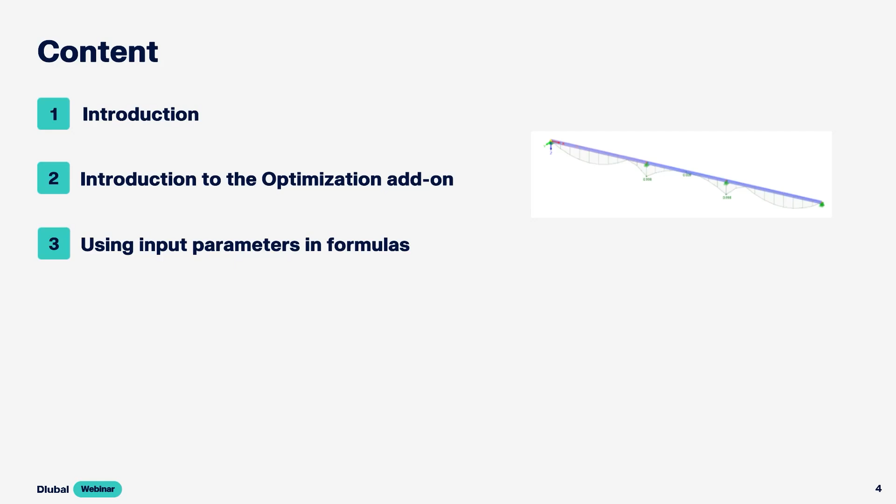Thank you, Andreas, and welcome to today's webinar. Today we want to deal with the optimization add-on, and first of all I want to show you how to activate the add-on and give you a small introduction, and after that I'm going to show you how you can use this add-on to optimize global parameters and how to use parameters in formulas and optimize them.

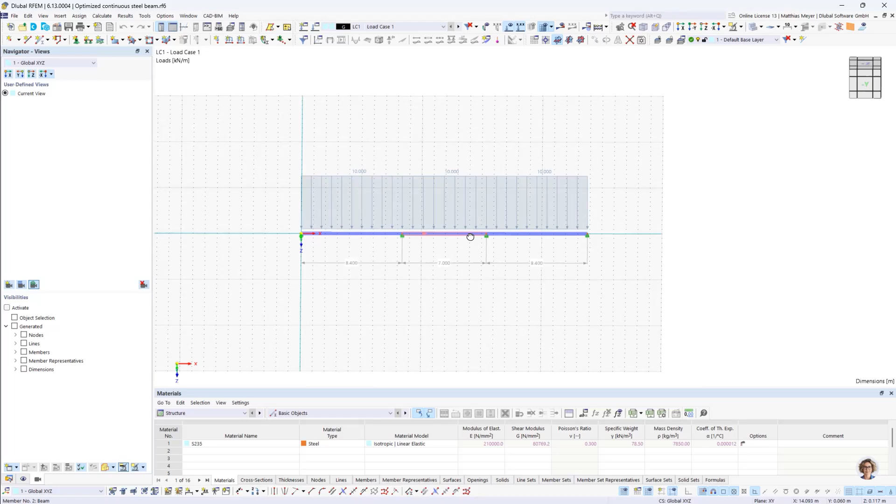So we are going in. First thing I want to do is optimize a continuous steel beam. It's going to look like this. We have two outer fields which have the same length and an inner field, and the length of the outer fields differs from the center field. So we have a symmetric system.

And what we also have is a continuous constant load of 10 kilonewtons per meter. We also want the self-weight activated, and we ask ourselves, okay, how long can this beam be at its maximum, which length it can span. The material is given, and also the cross-section is given. It's an IPE 240 and we have S235 steel. All right.

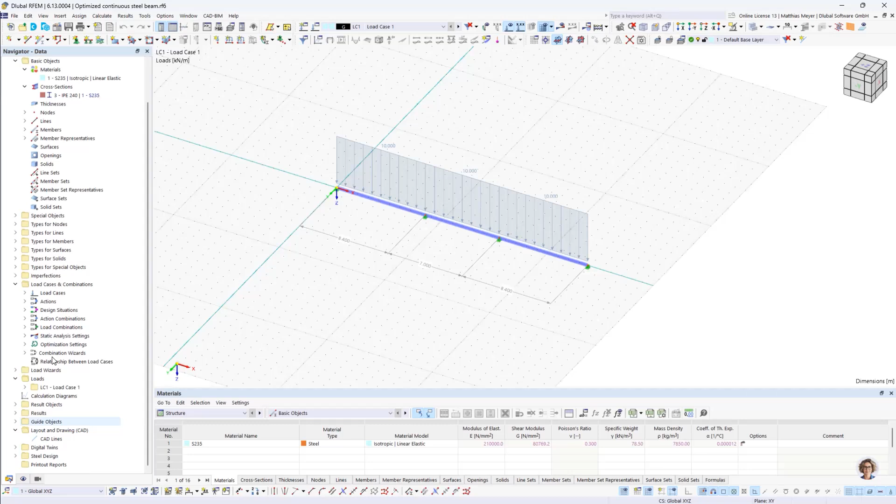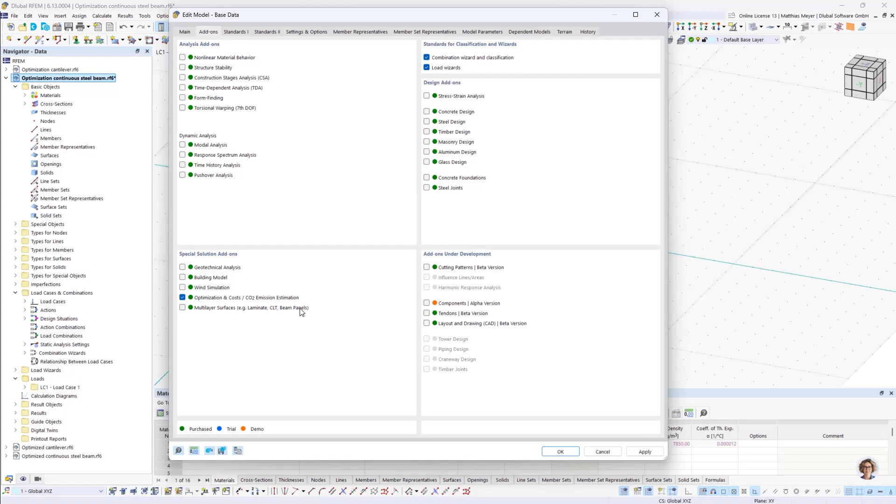So first of all, we have to activate our add-on. We're going to do this at the base data interface. Until recently, the add-on was here on the right side. Now it's on the left side. We activate this checkbox. We also want to activate steel design. And we're going to choose the recommendations of the CEN. And click OK. And the first thing we have to do is define our nodes.

The first node will be at 0, 0, 0. The second node is at 5, 0, 0. We don't know what the maximal span length is. This is just a guess, and for a start I'm guessing it's 5 meters. And so the next one is at 10 and the last one at 15. All right, then we have to put our beams between the nodes like this.

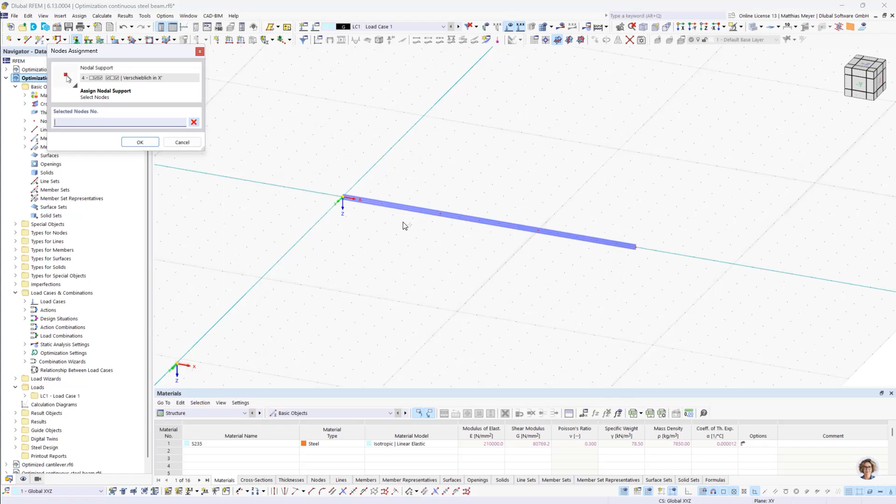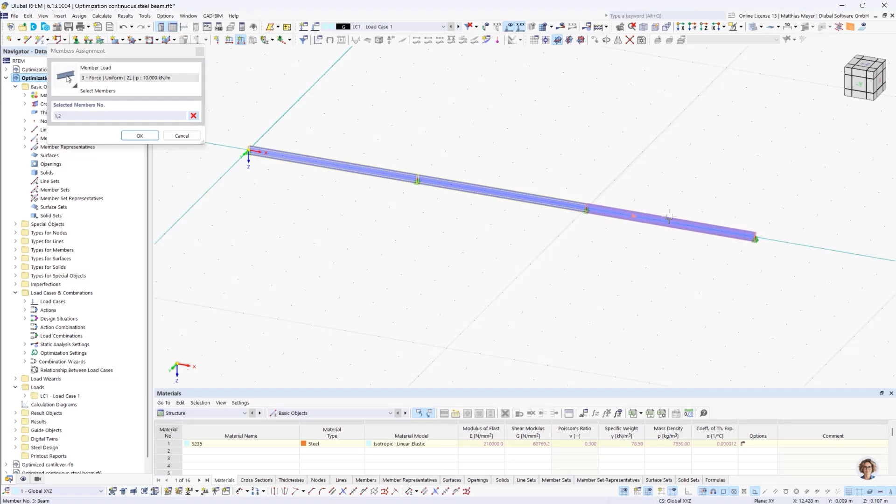Then we have to add some supports. The first node will be fixed in X direction. Okay. And the other nodes are not fixed in X direction. Okay. Small check if everything is all right. It is. And then we apply some beam load. Oh, this was the wrong interface. We need this one of 10 kilonewtons per meter. And like I said, the self-weight is activated.

And now we don't want fixed lengths, we want them dynamic. So what we are going to do is we open the nodes table, and now we define some global parameters. I am going to delete them. Yes. All right. So we go on global parameters like this.

And then we call the length of the outer fields L outer. We can also make comments to describe our parameters. Call this length of the outer fields, and then we have a length of the inner field, and give it like the same comment.

And that's it for now. And now we have to make the coordinates of the nodes dynamic. So the first one is still fixed, but the second node should be dependent on the length of the outer fields. So we give it this parameter.

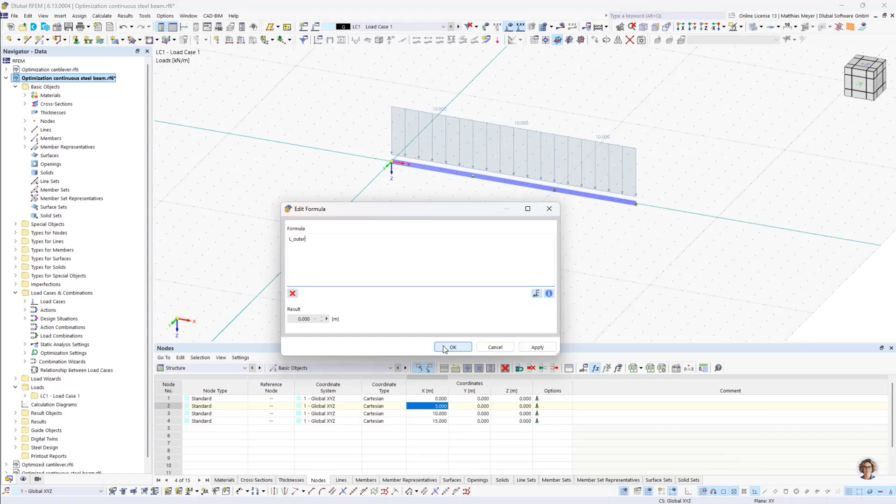We can also switch between parameter view and absolute view. And here the x coordinate of the third node has to be 1 times the outer length plus the inner length, not load, length for both. Okay.

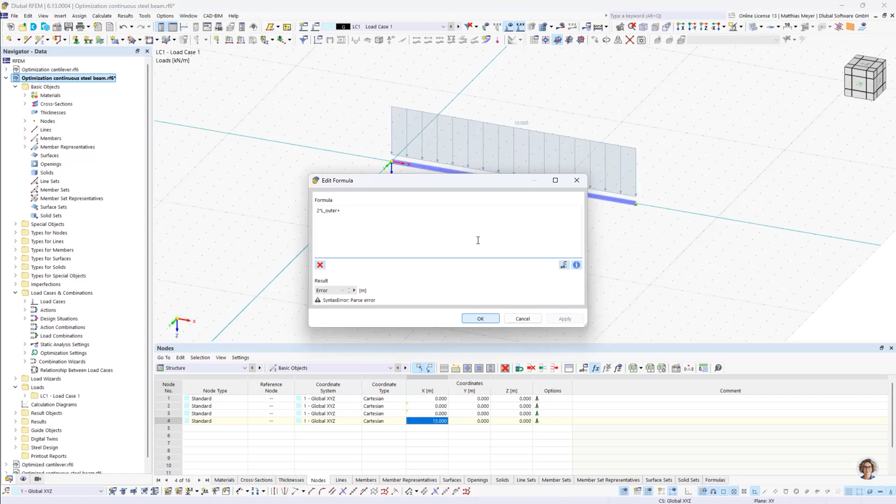And the fourth node has to be 2 times the outer length plus 1 time inner length. Here, double click. All right. So now it's all on 0. Why? Because we have to define some values in here. Like I said, we can start with 5, but we actually want to optimize this parameter.

So what we are going to do is we need a third formula for the whole length. So I call this L whole. And we define this as an optimization formula. So we define a formula, and the result of the formula we want to optimize.

Yes. So the whole length is 2 times the outer length plus the inner length. And right now it's 15 meters. And then we press OK. So our beam is back.

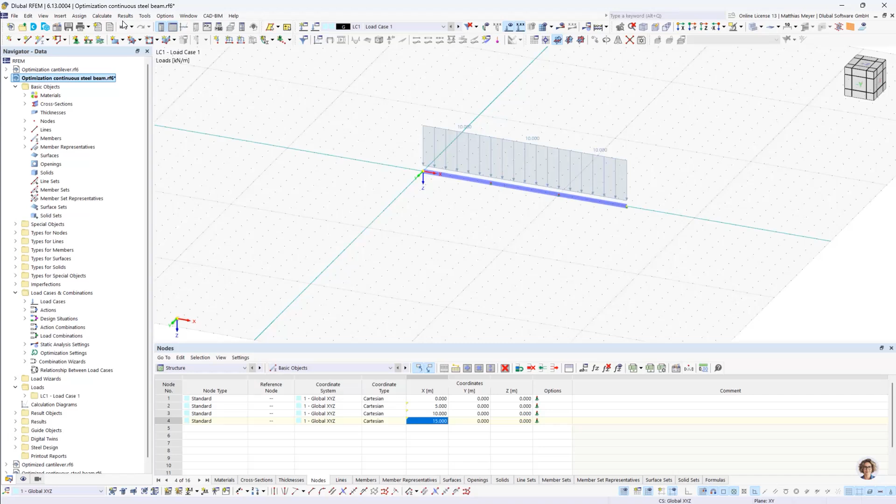And now we open our optimization interface here at Calculate, Optimization Settings. And we want to maximize our whole length. So we choose max global parameter. This is also new, also min global parameter. So these options are for minimizing or maximizing global parameters.

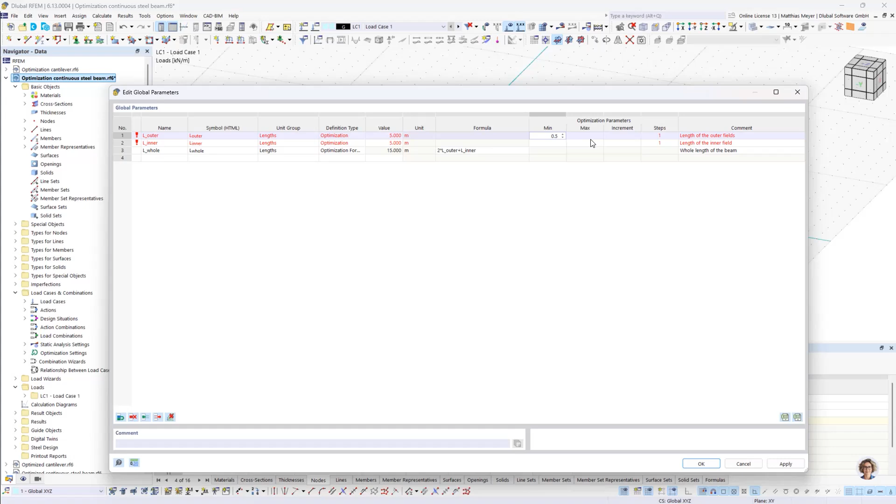Here we still have a problem because the parameters we need to change to optimize the whole length are not shown here. Why? Because we need to define them as optimization parameters. And for this, we also have to define a minimum and maximum value of this parameter. I'm going to start with 0.5 and put it up to 10.

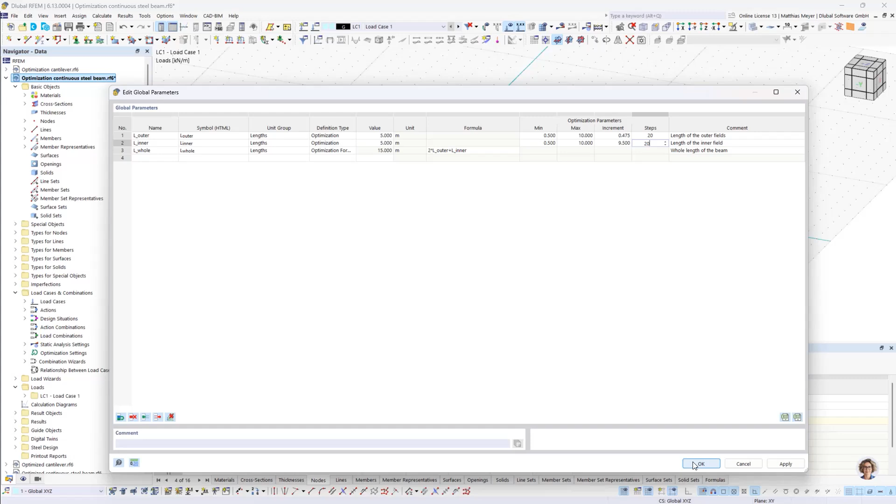So here you can also define the range of our parameter. If you say, okay, it shouldn't be longer than 10 or 11 or whatever, you can define this here. And we also need to define how many optimization steps we want to consider. I'm going to choose 20 for this example. Press OK, and now if we go back in our optimization settings, we can see our parameters here.

Right now we have 441 mutations, which is 21 times 21. So what the program is going to do is start with 0.5 for both of them, and then start increasing one of the values. And when it has done this 20 times, it will increase the second value for one step, and then use all the 20 other steps and so on.

So this is the most simple optimization procedure you can use. There are other possibilities, but for simplicity reasons, we want to stay with this optimizer right now. All right. Now we press OK. What we have to do first, which I forgot, is to press on activate. And when we have set this checkbox, we can also calculate this. Why is this checkbox here? It's so that you don't accidentally start optimization, because it will need a long time.

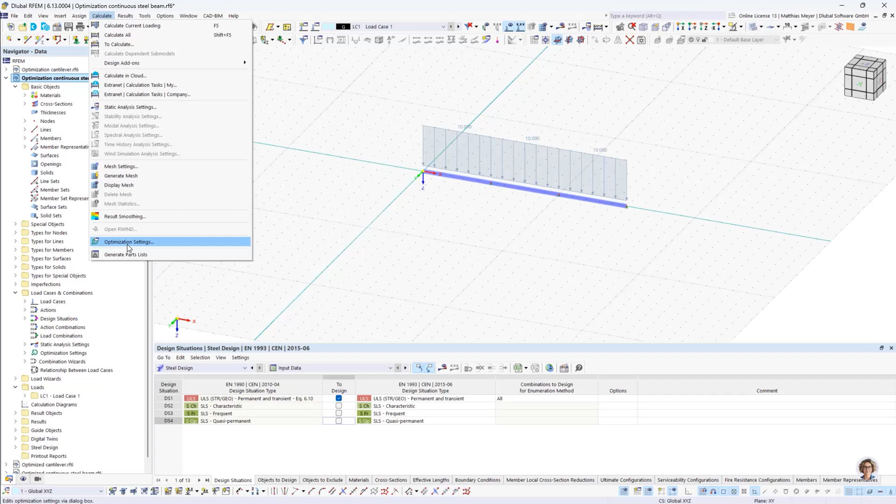So I also want to only check the ultimate limit state. So first we go to steel design and deactivate the other states like this. And now I'm going to start the optimization process. And you can see that it actually needs some time per step. So at one point I will cancel it, but I just want to show you how the calculation procedure is done. Like I said, it starts with 0.5, 0.5.

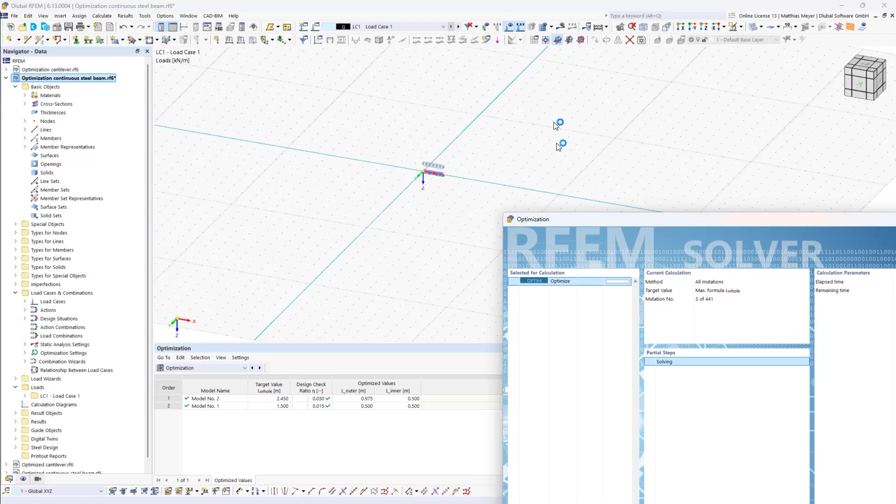It will also always adjust the model. And now it's increasing one parameter step by step. But like I said, 441 optimization procedures will take a lot of time, so I'm going to cancel this right now.

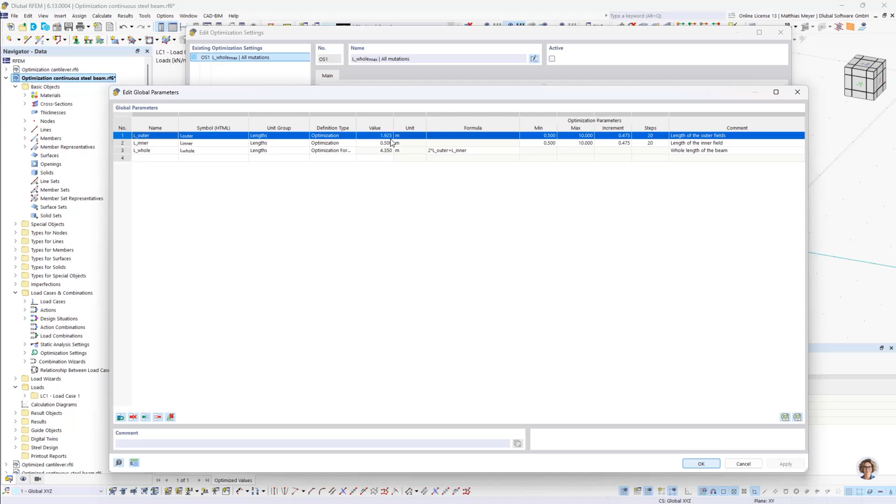Okay. If you cancel the optimization procedure, it will take the last optimum it could find and will set all our parameters to this last optimum. So it's set on 1.925 and 0.5, and uses this also for our model.

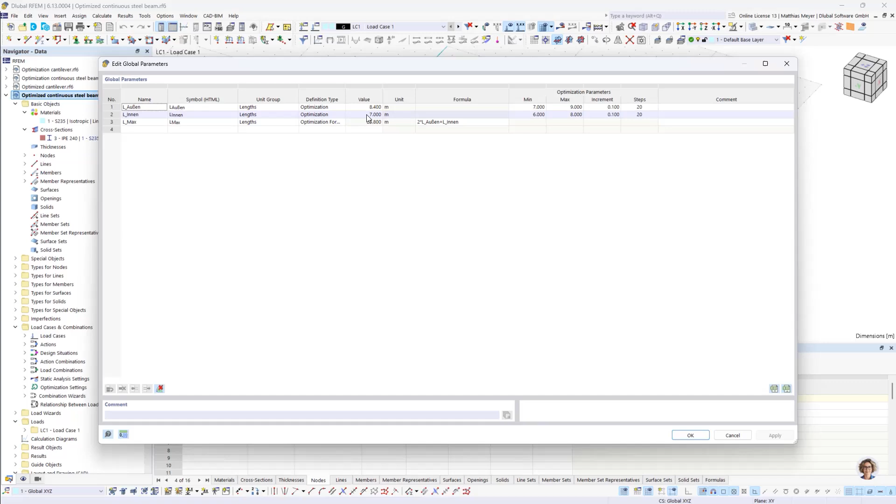Here I have the whole system optimized. You can see that our parameters are set to these optimization values, and I'm going to show you in steel design. Here you can see the utilization is almost at 1.0. We could use more steps and then we would get closer to 1.0, but for now this is fine. And for our maximum length, we can use guide objects for this using dimensions.

So in this case, the optimized length would be 23.8 meters. We can also see the biggest moment would occur here over the center supports, and also the outer fields are longer than the inner field. All right, so this was for the continuous beam.

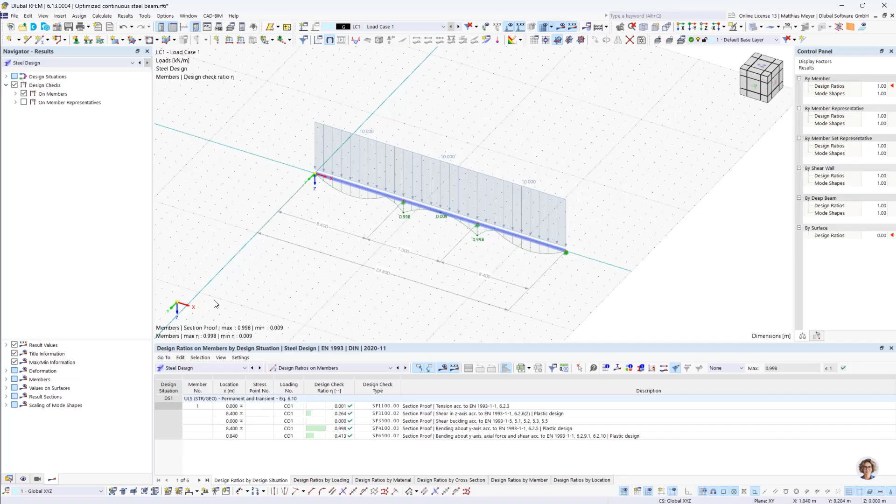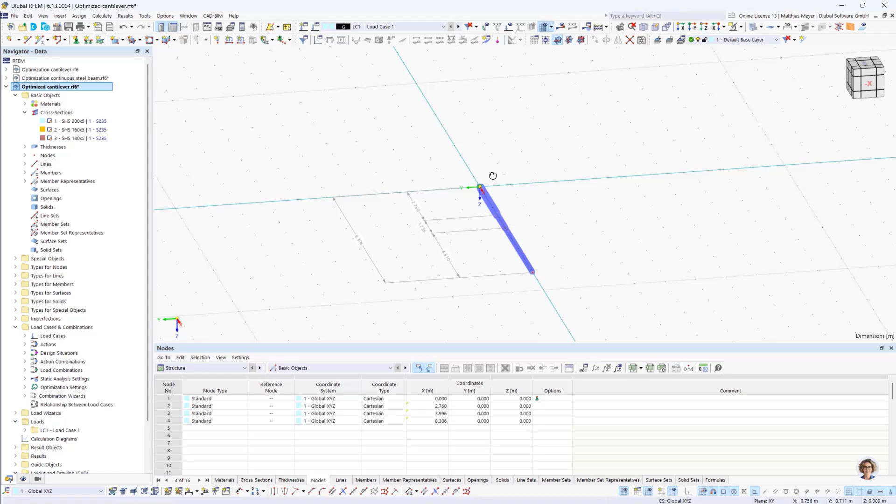And the next thing I want to show you is how we could optimize a cantilever. So we want something like this. We have a cantilever with 3 sections, and for each section we will use a different cross section. Here I choose these cross sections, and you can imagine that

because we have a linear increase of the moment, the biggest moment will occur here at the support. So we need the most resistance over here, and for this reason we could use a weaker cross section at the beginning of our beam, and so on. All right.

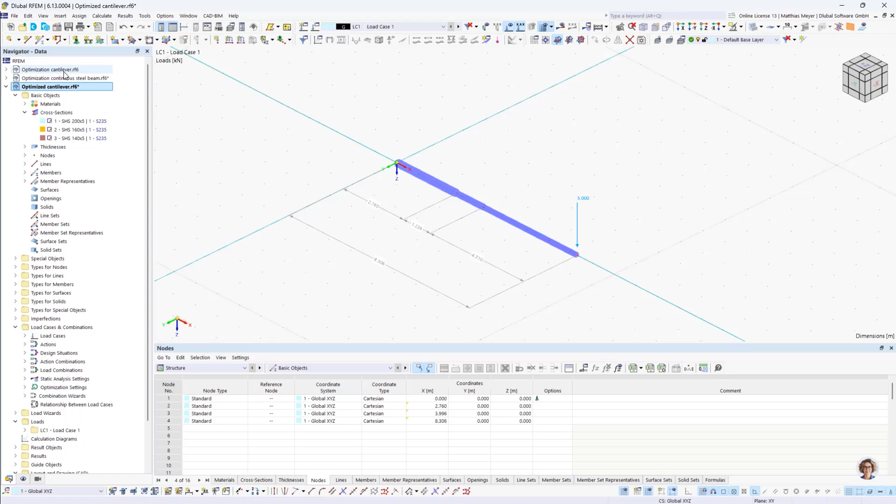So the first thing I have to do is activate our add-on again, also steel design, and I'm going to use the recommendations. All right, then I have to define my nodes, start at 0, 0, 0, and the first segment will have a length of 3 meters, next one 6 meters, 9 meters. Okay,

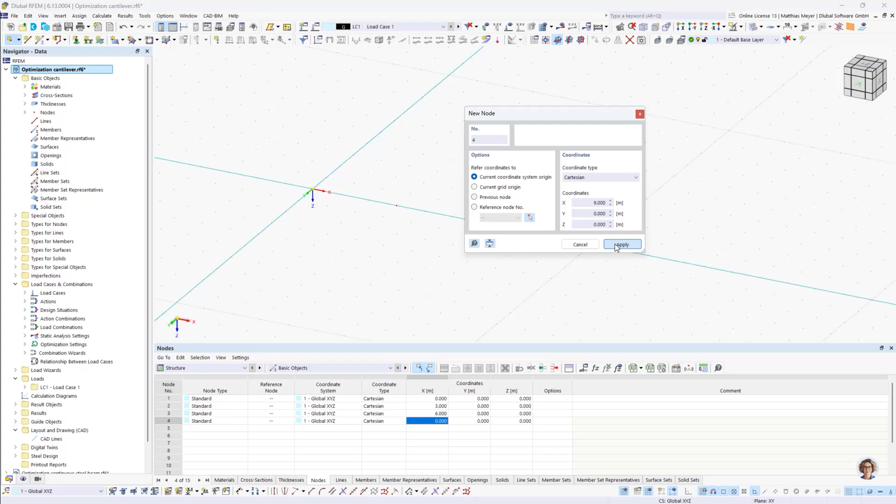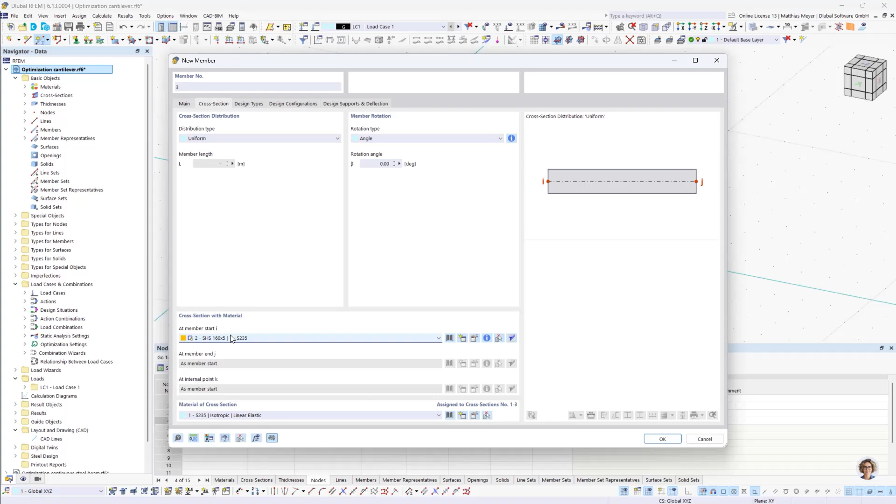then I'm going to apply our beams. Start with the strongest cross section. Then the middle strong cross section and the weakest. Like this. Add a nodal force, okay, 5 kilonewtons, and then I also need a fixed support at the beginning of the beam, okay, like this.

Also the self-load is activated, and now I'm going to define my global parameters. I name them length 1, length 2, and so on. And length 1 is the length of beam 1, and so on.

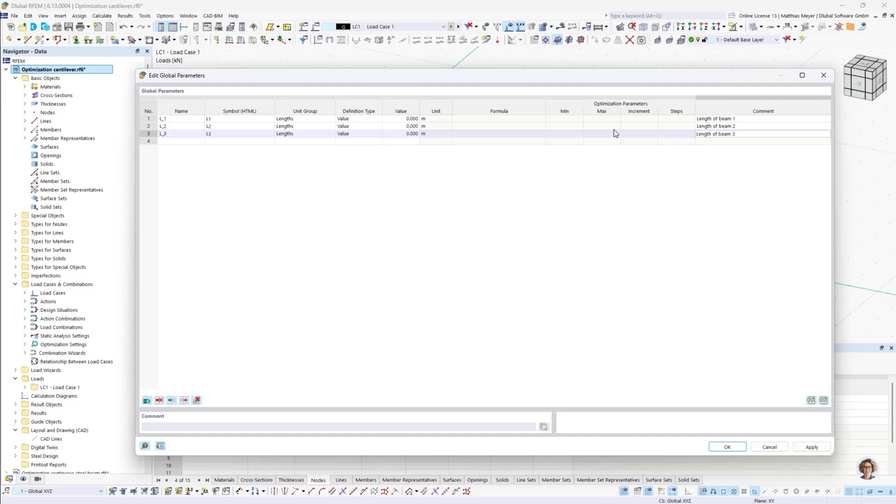Okay, I want to optimize them, so now I will change the type to optimization, and for the beginning we will stay with value, but I will change this after I applied these parameters to my nodes. So the first node is at 3 meters, which is 1 times length 1, and so on.

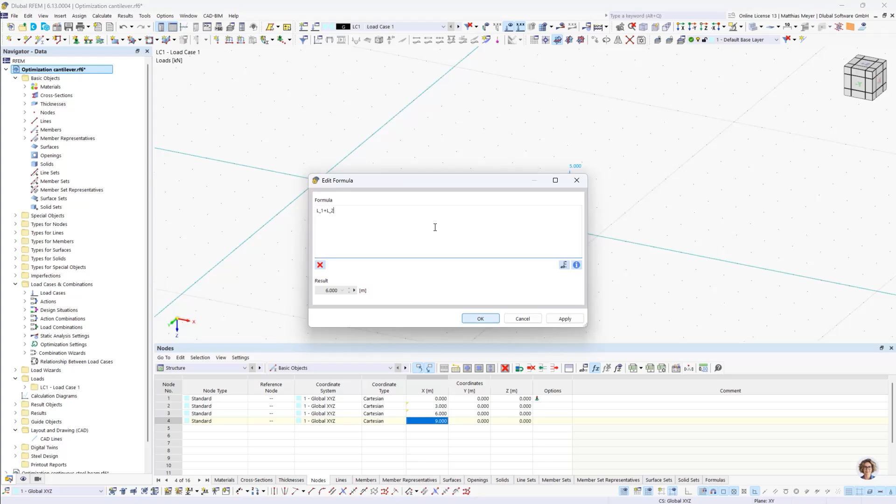All right, and the first thing we are going to do is conduct a steel design procedure one time, just to have an idea about how long our beams or our segments will be. And what we can see is, okay, the first segment could be a lot longer and the other ones are probably smaller. So what we are doing now is going back to global parameters.

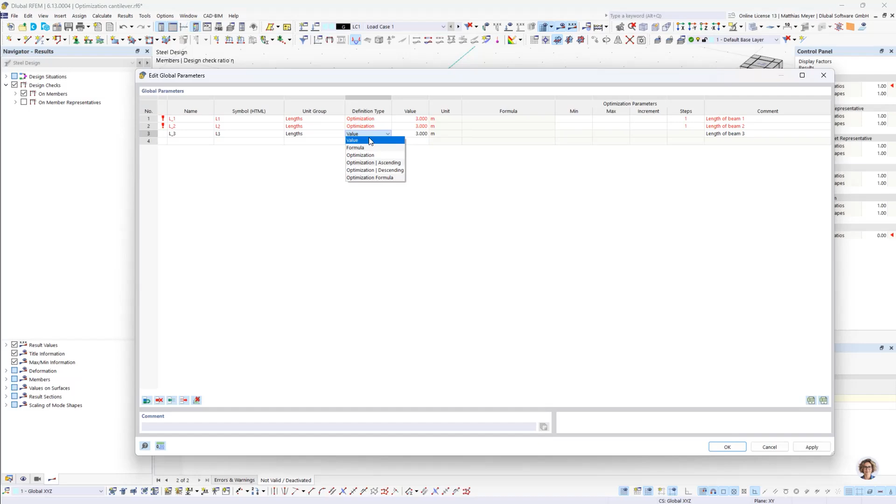We want to optimize them, so we put them on optimization, and length 3, which is the length of this segment, we are going to start with a length of 3 meters and give it a maximum of 6 meters. We'll use 5 steps. And for the middle one, I'm going to start with 0.5 to 2. I kind of know the optimized length, so that's why I'm going to choose this.

And for the last one, for length 1, we start with 2, and it's between 2 and 4. Like I said, I chose these values because I kind of know what the optimized length is. Okay, then after this,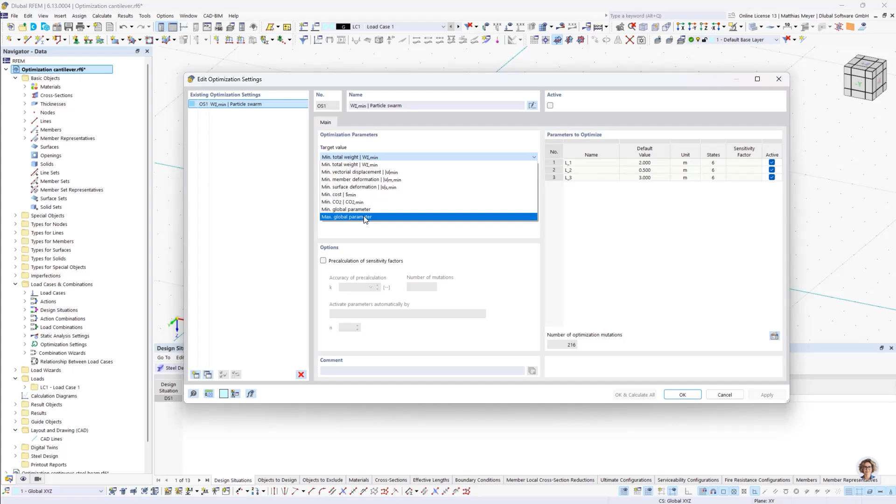we are going to open our optimization settings, and now we only want to optimize length 3, because length 3 is kind of independent of the other lengths. So we have to choose parameter length 3, deactivate the other ones, because we only want to optimize this one right now. Press on active, and then we press OK and calculate.

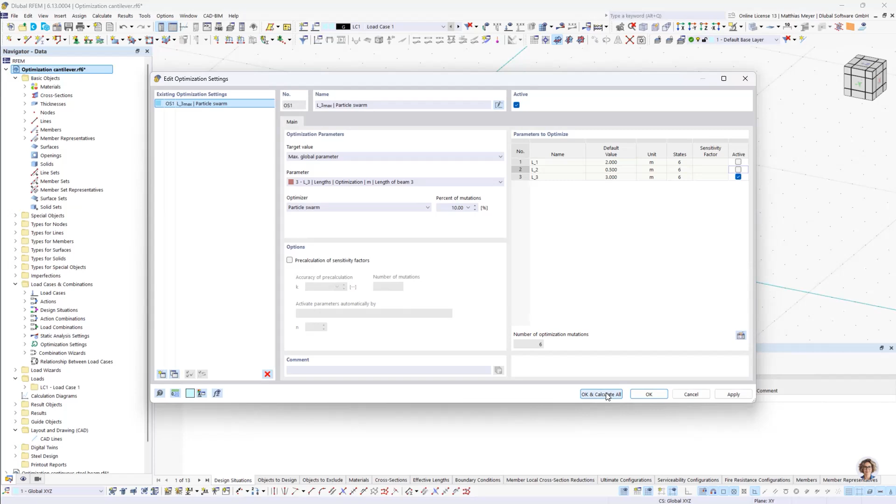So we have 6 mutations now. You can also watch our optimization process over here. And it's basically doing nothing, right? It's doing nothing.

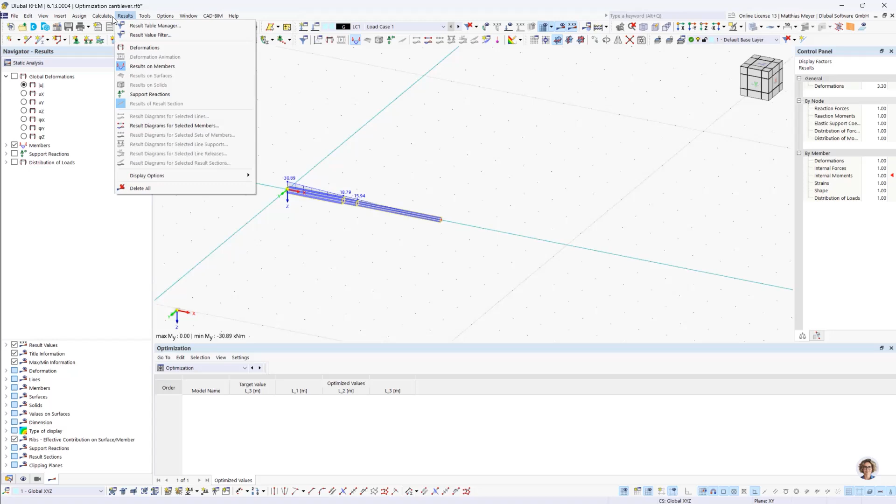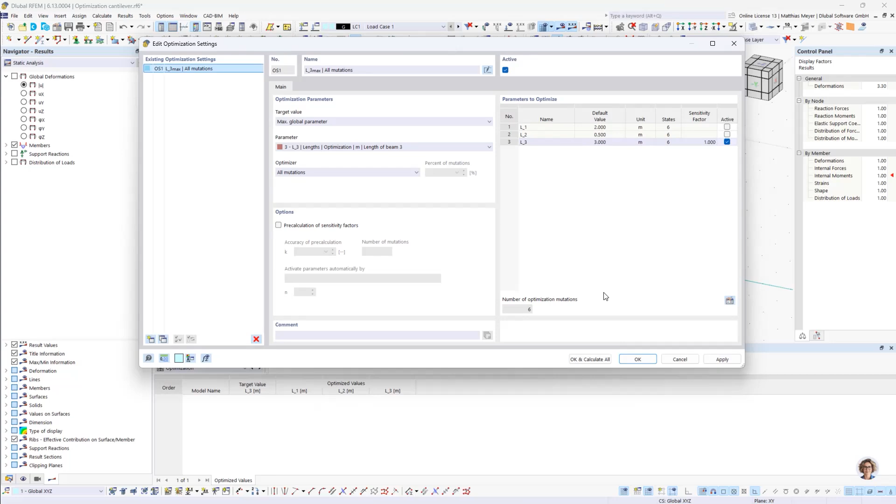Let's check this again. Length 3, between 3 and 6. We choose particle swarm, but I want to use all mutations. So we activate this again. And let's see if it's going to do some optimization now. Yes, looks good.

So we start with 3. We have a utilization of 0.6, now 0.8. And what we can do is, as soon as we found our optimized length, we can cancel this to save some time. So probably for the next one, the design ratio would be too high? Yes, it is. So I'm going to cancel the calculation.

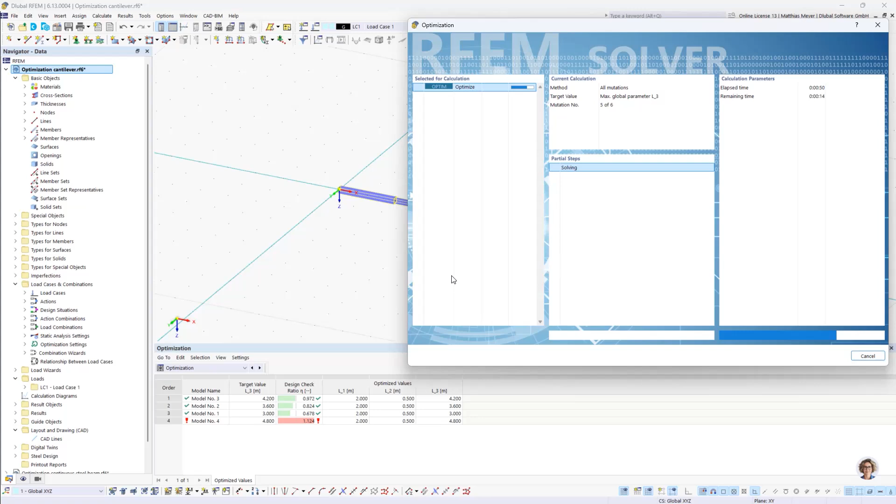All right. Now this one has a length of 4.2. You can check this by double clicking on the beam. Yes, 4.2. What I'm going to do now is go back to optimization settings, and I want to save this value. So I'm going to change this to value, so other optimization processes can't change this value. It's kind of fixed now. The length is fixed. I press here, and then I will continue with the length of beam 2.

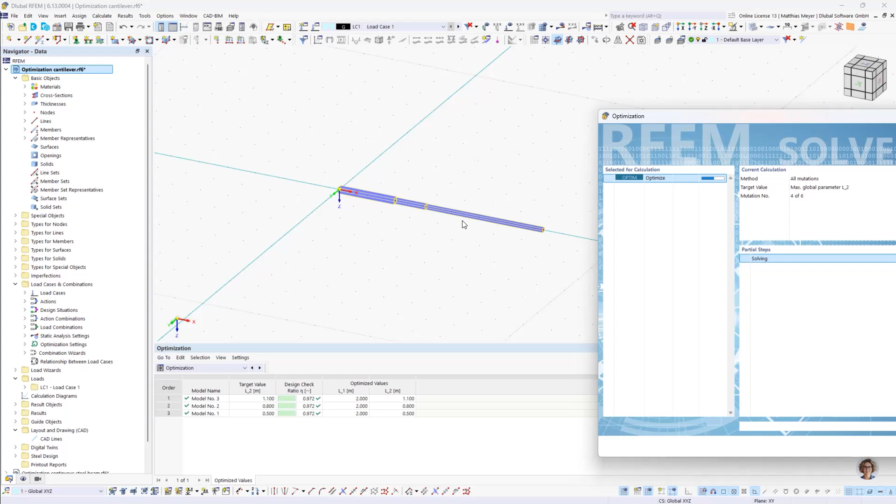Choose the same settings, but go to length 2, activate it, press on active, and we're doing the same again. And now it already starts with 0.972. Why are we still here? Because it still has the utilization of the first beam. But now with 1.7, this middle beam is too long. The utilization is more than 1, so we can cancel this.

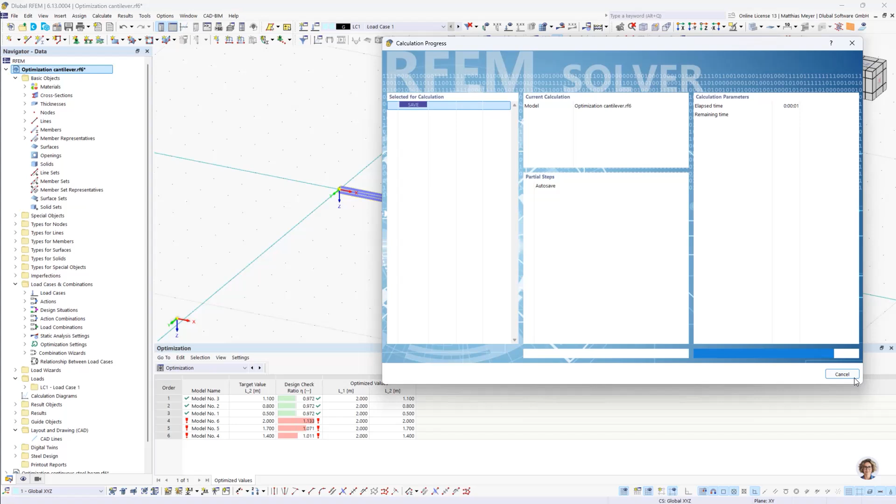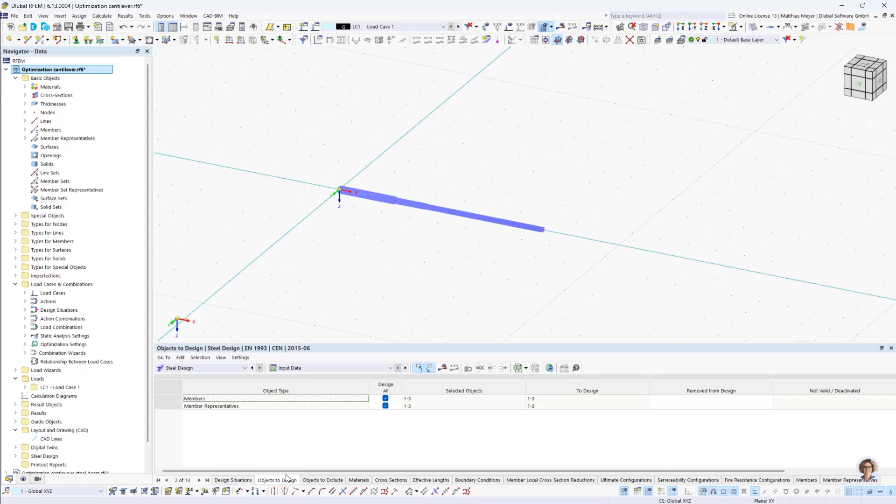And we are stuck with our optimized value of 1.1. We are going to change the definition type to value. And we also have to go back to this, because this no longer exists. What we can also do is say we only want to optimize beam 1 now. This can save us some calculation time.

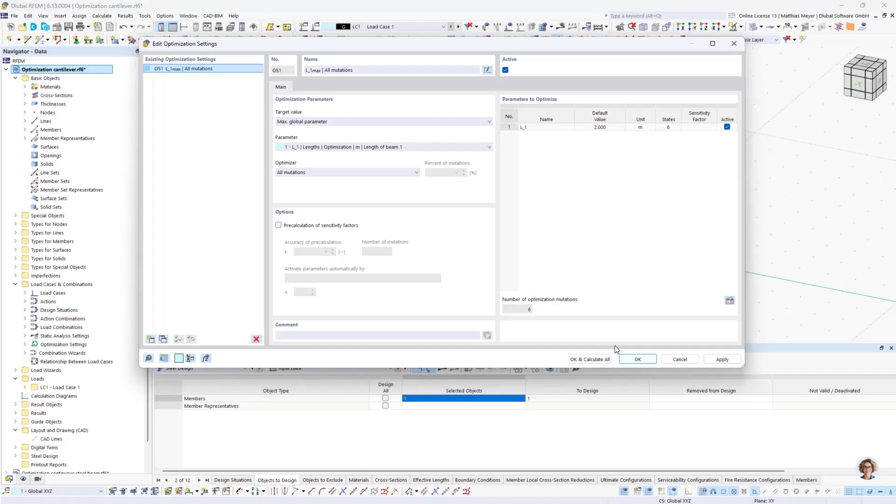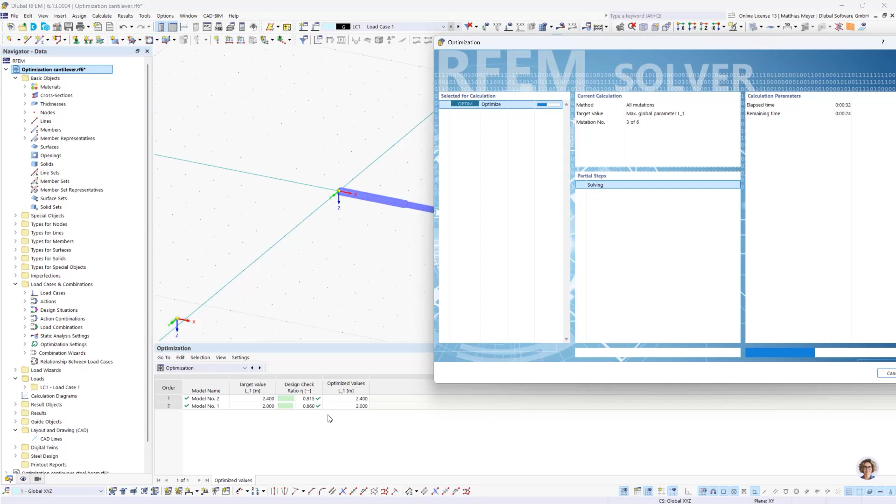Now we open the optimization settings again. We will optimize length 1. Now we have to activate, press on OK, calculate all. And now only beam 1 will be designed, which, like I said, will save us some calculation time. We start with 2 meters, and then it will be increased to 2.4. Maybe it will do one more. Yes, and probably the next one will lead to a failure. All right, so we cancel.

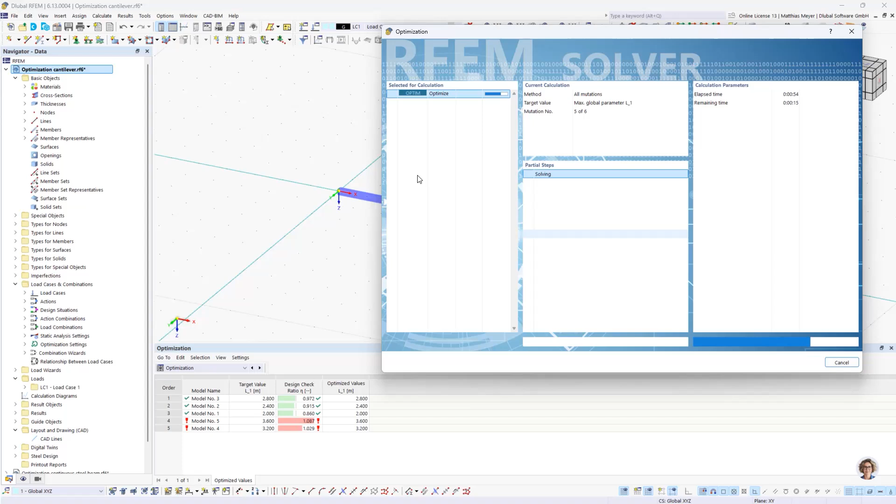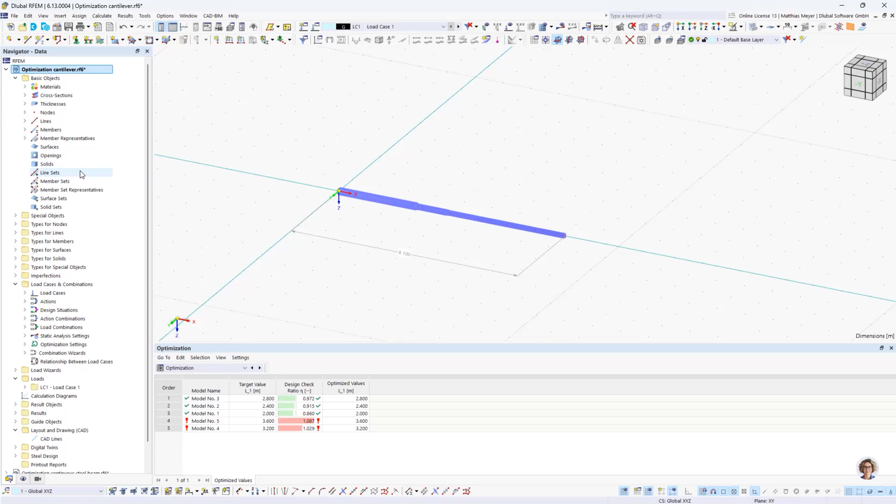Now we have our optimized cantilever. We can add some dimensions. And here we have a length of 8.1. I only used 6 steps, which is actually not that much. If we have a look in our steel design calculations at the utilization of all beams, we'll see that there's still room for longer beams.